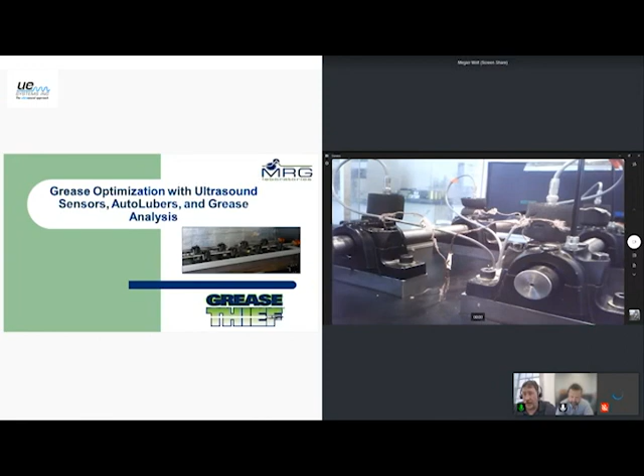In the background, I've got a little PowerPoint running to stay on topic. We're going to talk about a couple of advanced strategies for optimizing grease lubrication, one being using ultrasound and tying that in with the timely delivery of grease to the bearing being monitored, and the other being what we can learn from sampling that grease and analyzing it and looking at the chemistry and the wear and so forth. So two technologies that are quite complementary.

We'll introduce the idea of why bearings fail due to both over lubrication and under lubrication, and how ultrasound can play a really important role in getting that situation under control for a facility. I will talk about the role of ultrasound in delivering grease, how that becomes a solution for these problems of over and under lubrication. And particularly here today, talk about online sensors and how that can get us into a state of optimal grease delivery with real-time feedback into the process.

Then I'll give you a chance to talk more about the kind of problems that can be found in the bearing itself, once a bearing was installed and it had damage, or it developed some damage over time, and how ultrasound can pick that up. Then we'll get into the demo of the test stand and show how these sensors integrated with the auto lubers work. And then we'll crack open a bearing in the lab and show how we use the Grease Thief sampling kit to pull a sample out,

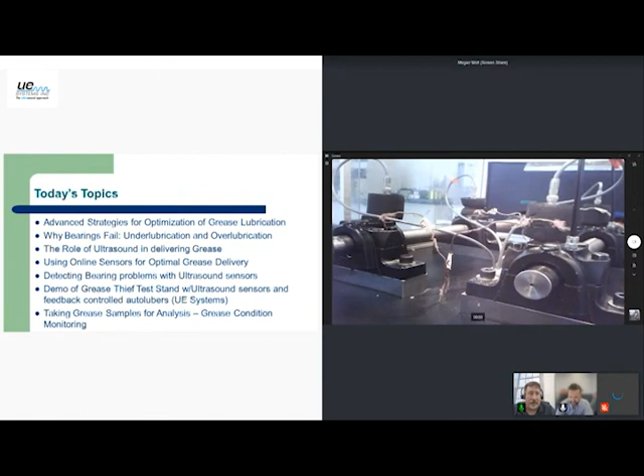and talk about the analysis that can be done once we have that. But over and under lubrication, the point is, unless we know exactly when and how much to add, then we are by default over or under lubricating.

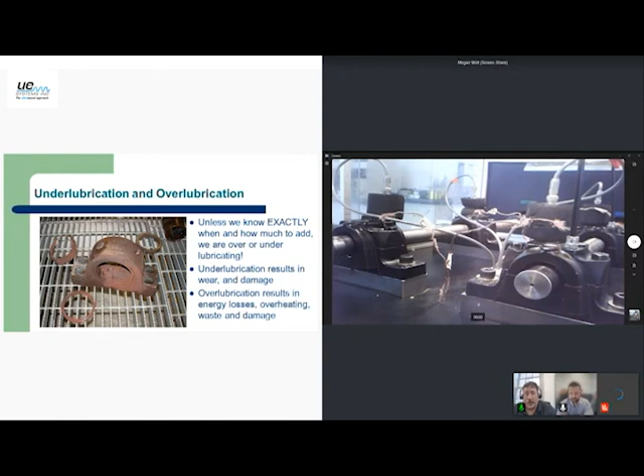And under lubrication, we'll talk about both of these. Under lubrication results in wear and damage, and over lubrication can be things like energy losses, overheating, and so forth. I've addressed this in the past in the context of really sustainability when it comes down to it. Sustainable processes towards lubrication, and how the default state of the industry ends up being over greasing, in my opinion. And here's some reasons why.

So you've got three potential states. One is, well, you just got lucky and you are greasing exactly how much needs to be there at the exact right interval. Or maybe you're using these technologies to get you there. But nonetheless, if it's not the exact amount that's needed and when it's needed, you're either under greasing or over greasing.

If you are under greasing, that means that there's either an inadequate quantity of grease to the location that's needed, or it's being delivered there too infrequently. And so the result of that is machine damage. And machine damage leads to failure and loss of function. So what is the natural human reaction to machines failing and the confirmation of a lack of lubrication? Well, the response is grease more.

And so once we grease more, now we get into overgreasing. And when we have overgreasing, what are the effects? Well, there's machine overheating. There can be cleanliness issues as the grease gets into other areas it shouldn't be. We have the excessive cost of grease. We're spending more to purchase and use grease than we really need to be. There are disposal issues about the excess grease that's there, and then some hidden effects.

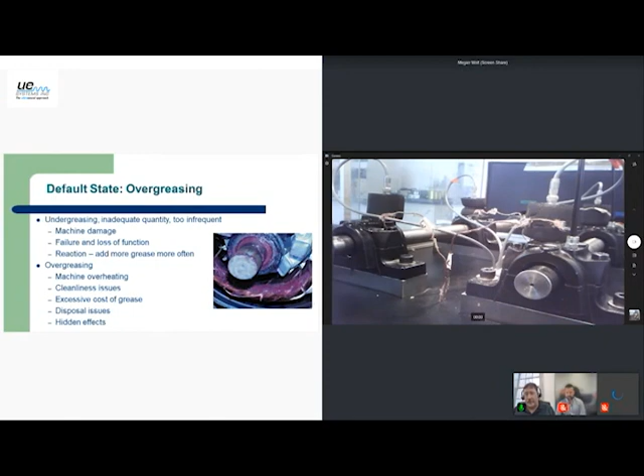But I think when you look at all of these, they kind of fall under either hidden or harder to see. It's easy to see when the machine has failed. Everybody's involved. Everybody knows there's noises, there's bangs, and we're not producing what we're supposed to be producing. But when our default is overgreasing, it's a quieter situation. It's less obvious and less in need of immediate action. So I would say from the typical human response and how we operate in most production facilities, we end up overgreasing most of the time.

And so that creates this opportunity to reduce grease demand by moving towards optimization. If we're mostly overgreasing and we move towards the optimized state, that's going to save some grease. It's going to move us on that line of sustainability. So this gives us an opportunity to extend grease life, to eliminate unnecessary relubrication, and to raise the awareness of the impact of over lubrication on cost, as well as the impact to the planet, the impact to sustainability of our processes. And so we can actually get into some calculations about, say, the carbon footprint or the emissions coefficients of using grease unnecessarily.

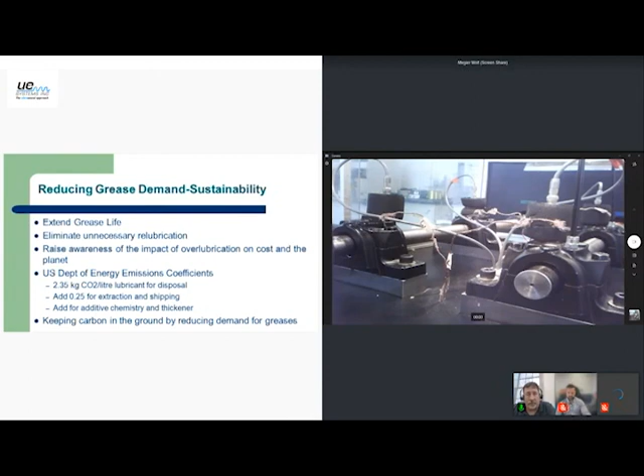And there's some calculations that we can do here, and I've gone through some of that, but ultimately we can determine what our footprint is for a non-optimized greasing situation, and actually project what we could do for our companies or organizations by moving towards optimization. It involves keeping carbon in the ground, because that's what we're putting into the machines, hydrocarbons as greases. So Blair, I'm going to put one of the first slides that you gave up next, and let you lead in this evolution where we talk about how we've historically done it and how we move to some of the options that are out there today.

Yeah, and thanks, Rich. It's always great hearing the sustainability part. That part always really impresses me. And we are doing some studies around measuring friction and that cost of friction and what that means to increased load and energy and things like that.

But as we look at this now, keep in mind, this is how Blair sees the evolution of bearing lubrication. It's not an exact timeline here, but if you look at when we started lubricating machinery, we started generally with whenever lubrication, and what I mean by whenever is, when we get to it, I'll lubricate. If a little bit's good, a lot is better type strategy, and that still exists in our factories today.

And depending on the bearing type and the machine type and the load and all those things, it can serve somewhat okay. But really, what happened over the evolution is companies developed formulas, and there are some standard formulas. There's some different formulas, there's some variants in those formulas, and it doesn't really matter what formula you use. Any of the formulas, at least that I have seen, always has some variables in them that change over time.

Speed of equipment, and more, we're seeing particularly rotating assets move towards VFDs, so variable speeds, in lieu of control valves and things like that. So they're starting to ramp up and ramp down the speed of assets based on production demands and things like that. There's temperature. I'm based in Canada, so our summers do get hot, but our winters sure do get cold. So temperature can have a big fluctuation in how much and when to lubricate. So those calculations do have a lot of variance in them.

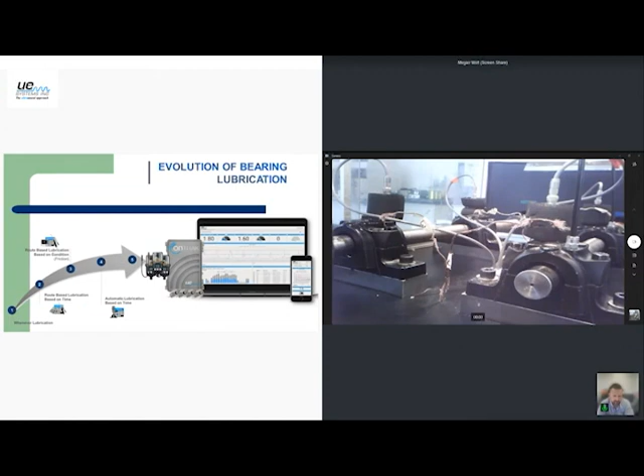So what are we doing when we're using ultrasound? For those that aren't familiar with ultrasound, I'll keep it high level. And if you do have any questions, we can definitely dive a lot deeper into the theory and use case of ultrasound. But essentially what we're doing is listening to things that you can't hear. We're listening at a very high frequency that even dogs can't hear, right? So this is above 20 kilohertz. Typically, we try to center our frequency around the 30 kilohertz range to measure that.

And what we're doing is essentially measuring the friction in the bearing. And the reason I say friction is because it becomes very simple to understand and use, even as you get up to the C-suite, to justify things like this or to explain what you're doing. Friction becomes very easy to understand. Friction is bad. We don't want friction in our equipment. So it's really simple.

That's the friction: the bearing friction increases, and it increases for two reasons. One is lubrication. So there's a lack of lubrication as that grease starts to degrade in that bearing. Obviously, that friction is going to go up. But also, we can look at the monitoring side or the health of that bearing as well.

So if there's a defect, I don't care if it's inner race, outer race, cage issue, individual rolling element issue, it's all going to produce an increase of friction. And how much that friction increases and what that pattern starts to look like, obviously we can start to do FFTs and look at bearing pass frequencies and things like that, becomes very dependent on the failure mode.

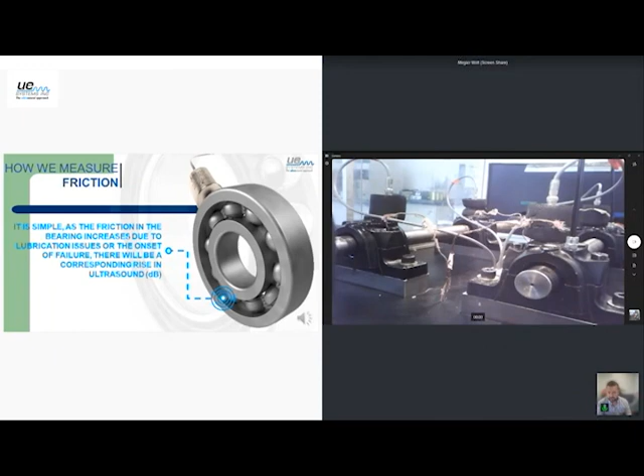And if you go to that next slide there, Rich. So this is an exaggeration. Now this is under lubricated. And I fully agree with you, Rich, that what we see, unfortunately, is over lubrication. And I can tell you, back in my history, when I was green, I definitely over lubricated, and we see that all the time. And I'm starting to see the messaging around not over greasing really start to resonate more and more in industry as we attend conferences and things like that. So I think we're heading down the right path.

But with this ultrasound technology, we're continuously monitoring the bearing friction. So we're fundamentally answering two questions. These are the same two questions that Rich brought up earlier: know when grease is required. So when we see an increase of that friction, the question is, how much does that ultrasound, and we measure ultrasound in decibels, have to increase? Right. And we'll answer that on the next slide here.

So we know based on ISO standard when the increase is likely related to lubrication, and when it's a defect beyond lubrication. And we have tons of case studies we can dive into. But not only do we know when grease is required because of that increase of friction, we know precisely how much is required, because we're trying to restore that friction back to its ideal level. It's something you're going to hear us refer to as the baseline. And how you determine that ideal friction is a conversation on its own.

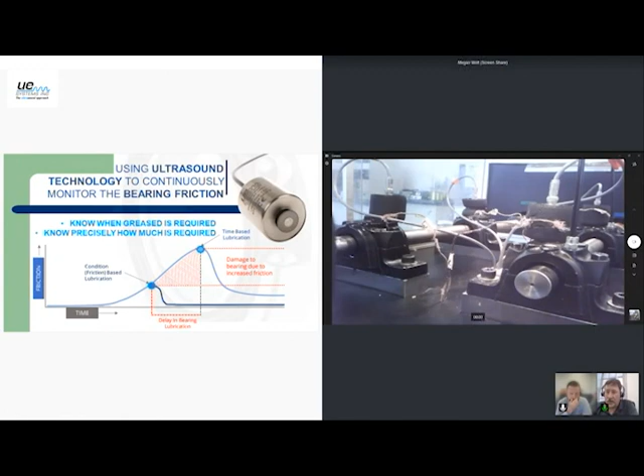But what you observed with implementation of a system like this tells us that idea that less more often is better than more less often is borne out. I should have talked to you earlier, Rich. Is that what you're saying? No. I mean, it's great, and these things take time. All along, by using these technologies and good principles, we've been incrementally improving lubrication, and this is just another step to get us closer to optimal, which is great.

Excellent. Let me go to that next slide. So how do we determine that increase of friction or decibel? I will interchange ultrasound and friction during this conversation on purpose. This is an ISO standard, and it states that once you have that baseline, an 8 decibel increase indicates a lack of lubrication. There's other things that can affect that friction. A 16 decibel increase indicates it's likely damage to the bearing beyond lubrication. And 35 is critical failure. It's walking down the hallway, the temperature's hot and things like that.

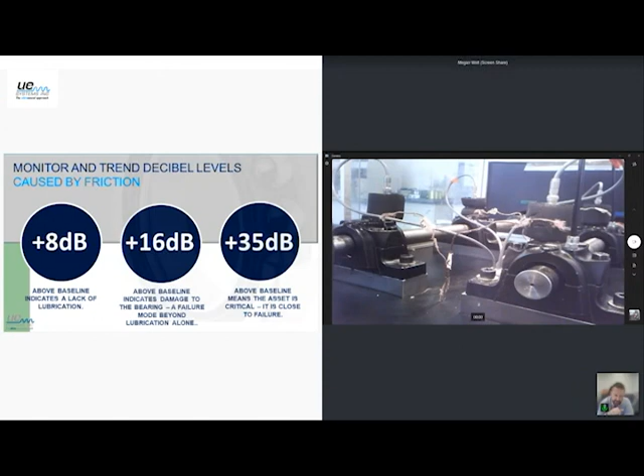In fact, we have a bearing in this lab that's not quite at that stage, but it's definitely not a healthy bearing. Maybe you can go to that next slide for me, Rich, and Sloan, if we're going to get into the live demo, could you start that machine up? We do have a bad bearing in there, so we don't want to run it through the whole demo. So maybe, Sloan, we could start that up just so we can get some data in.

But we're going to start. We'll show you some live data coming in from these bearings, and on purpose we have one that needs lubrication, we have one that's completely dry, and we have one or two that are hand packed or lubricated.

And what we're going to see here is a trend like this, and there'll be some other widgets that you'll start to see here. That green line, that dotted line on the bottom with the blue squiggly line, is the baseline, right? So that blue line is that friction we're measuring for a 24-hour period. That green is the baseline. So this is where ideally we want to see this.

Now you will see some peaks and valleys in that blue trend, and that's normal. There's no such thing as a perfectly smooth bearing. There's always going to be slight increases in friction, things like that, load changes. That blue dotted line, that's our lubrication level.

That's 8 decibels over. And what's great about that is there's no such thing as a bearing that needs lubrication and somehow fixes itself other than needing lubrication. So it has to go above that blue line and stay there, and that's our sign that it needs lubrication. And then you can go in, you can lubricate it manually, or the system can lubricate it for you, restoring to that baseline.

That yellow line is the warning. So if it goes above there, then you're starting to have some issues. Now you can wait for that lubrication to hit that level and then try to restore it, but you might be putting some secondary damage into that bearing. And that red, we don't see it too often, but unfortunately we do. It's not in a good state.

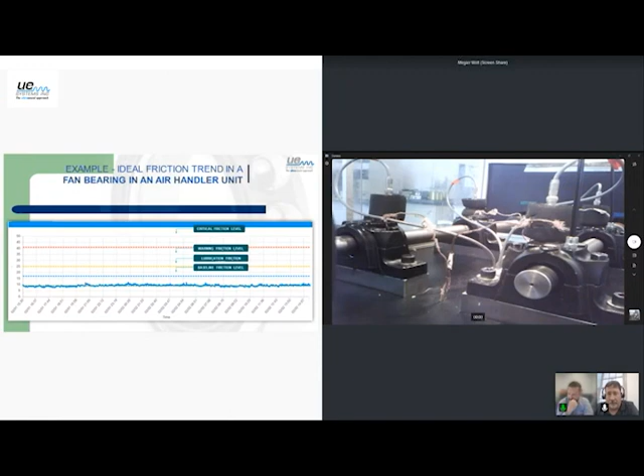So what we're going to see here is, again, that slide before was the ideal, right? This is what it looks like when a bearing needs grease, and this is an air handler unit. So you can see it go above that 8 decibels, it stays there. And if you reference that previous slide, you start seeing a lot more impacting. So the first thing we actually see is impacting, then the decibels start to go up.

To give you an idea, the OnTrak system is sampling the friction data from each bearing, and the OnTrak can monitor 16 independent bearings and lubricate 16 independent bearings. It's measuring that bearing friction at the rate of once per minute. So we get very, very granular when you think about an online system. So we start to see impacting, and we've picked up things like loose belts that will show up in friction.

But you notice here, when the user went to go lubricate, there's a mode I call human in the loop. So it gives you an alert. It'll send you a text message saying, hey, bearing 101 and 800 needs lubrication. And you say, okay, go lubricate. And there's also a fully automatic mode where it will just say, hey, bearing 101 needs grease, I'm lubricating, right? And it becomes a trust thing. So there's different methods of doing it.

It's interesting because we've seen people move from, I used to grease this motor once every year, to, if I get an alert, I can't wait till the next morning to lubricate. And I said, well, you were going to wait another 8 months before you lubricated, but you can't wait till you get back into the office. And I'm not encouraging anybody to do it.

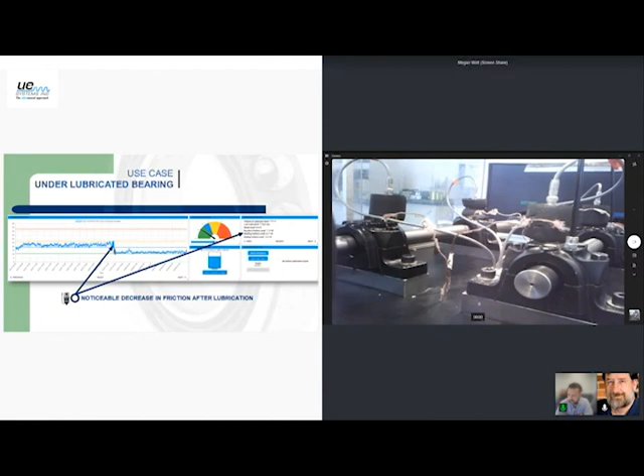Did you want to go over to the demo, Rich? Maybe I can't hear you, Rich, if you are talking. Maybe Tim, you could share your screen for me. Perfect. Thank you, Tim.

I'll do a quick introduction. Tim Going is our head of commissioning for UE Systems. He goes around and does these commissionings. So he's seen a lot of this data, a lot of these sensors. So I'll quickly walk through, and Tim, you're more than welcome to join and comment if you need to, or Rich.

But just to give you an idea, what we see on here is the friction level on one trend. Now you can customize these trends to show one, to show them all, things like that. But this is real data coming in from this system. So if you look at the top legend, sensor number 5, this is the blue here. And what we're seeing down here is this blue. If you notice, it's a little bit below.

And because this bearing skid, and Rich, you can jump in here, is essentially a motor spinning a shaft on two pillow blocks, there's really no load, right? So we're not going to see a huge decrease in that friction because there's no load. If we were to put a load, it'd be changed. And because it's an open bearing, we're not going to see a big drop.

But you can see this blue here is the sensor that needs lubrication. Sensor number, I think it's 6 and 3 are the ones that are lubricated, and sensor number 4, this guy right here, this is the dry sensor. So even just looking at this and understanding that maybe this audience doesn't understand ultrasound and how we're measuring it, just look at it from a friction point of view.

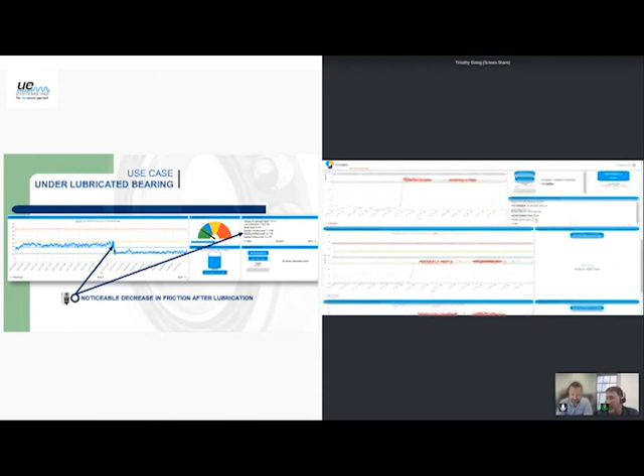Yeah, well, let me ask an actual important question right now, because bearing 4 here, we started with it dry. And Sloan was just asking, can we shut that shaft down? I don't know if you're monitoring bearing 4 right now. Yeah, you can shut 4 down, absolutely. Okay, so as long as it doesn't affect 5. It shouldn't. 3 and 4 are on one shaft, and 5 and 6 are on another. So yeah, absolutely. She should have the word there to move ahead with that. Yes, and thank you, Sloan. I don't want to kill that bearing. Yeah, exactly. That would be bad while we're trying to demonstrate the values of this, to run with the lubricant starving one of our bearings. So go ahead there, Blair.

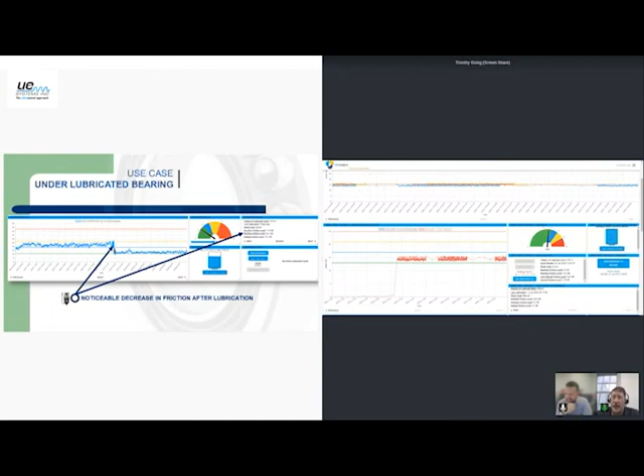Did you have a specific question for me? Well, just maybe go into details of why we have to fill that housing just by the design of it. Oh yeah, so these particular housings, they're kind of a unique or different kind of housing where it's not a typical pillow block which has a dual row. A lot of times they're going to be like dual row spherical roller bearings with W33 groove, and then a center grease delivery that goes right through the outer race and in through the bearing. These are straight back bearings like you would see in an electric motor application. And then the housing is a straight bore, and the grease gets delivered to the side of the bearing.

So here what's happening is when that grease is being delivered, first off, you have to have a primed line up to the point where grease enters the housing. And then it's going to lay that grease right in front of the bearing. So sometimes you have to build up a little mound of grease, if you will, along the face of the bearing before new grease being added is actually going to contribute into the raceways. And this is actually more similar to what you see in electric motor applications. So this is more like an electric motor shaft simulator that happens to be held by pillow block bearings. Excellent. Way better job describing that than I would have, Rich.

No problem. So what we're seeing here is that real time, down to the second, friction level. So you can see it's bouncing around, and it may take 2 iterations. So you can see on what we call the status widget, it says waiting. So it said lubricating. So it put grease in there. What it's doing is just patiently waiting. It's waiting to see if that friction is going to change and if it's going to need to put more grease in. So as we're waiting, it's going to count down, and that time is 5 minutes.

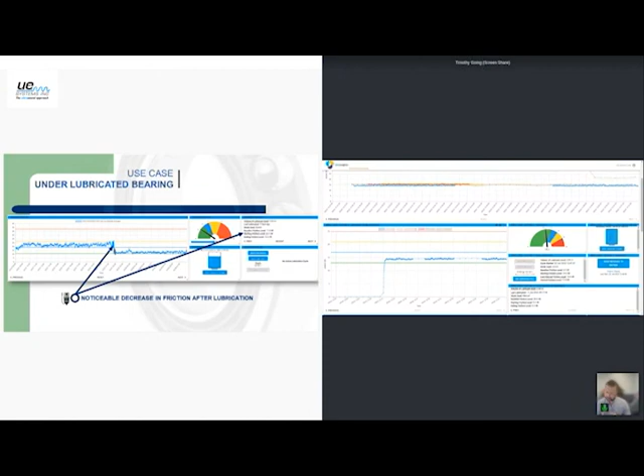And what I'm going to ask you to do, Tim, if you could just click on the average value, that blue line on that widget for me, and I'll talk a little bit about what this is. And maybe you could hide the red one for me, Tim, just so we could discuss this. So one of the things is because we're taking the samples so quick, we're taking it every second, we are going to pick up peaks and valleys, right? We're going to pick up grease hitting that bearing, going through the housing.

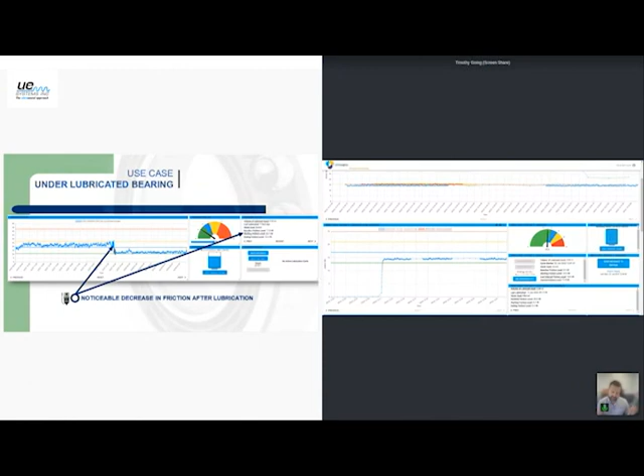So one thing we do in the software platform is we take that raw data and we average it. We use a moving average. And it smooths out some of those bumps, and we can change how many samples are in a moving average. But we like to look at this, and oftentimes we'll hide the raw data and just show this moving average because it looks smoother, and it shows that drop better. So I just wanted to make you aware that we have two ways of measuring this.

So we're down to a minute here. This is the watching a pot boil.

Thank you. So we can start to see here, our baseline friction is 0. And we actually do put it to 0 sometimes when we're commissioning, just to see how low we can get that number if we know the conditions of the bearings and things like that. So our starting friction was 14.6. Our last interval friction was 14.6. So we've only done one interval. We've only put in grease. We put in 2 cc's at one time. So that's what we count as one interval.

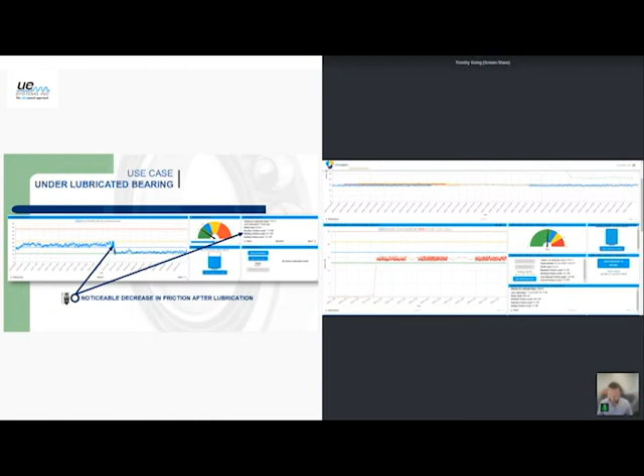And our current friction level is 14.7. So we haven't changed that friction yet. But I imagine here in 26 seconds, as we put more grease into it, we'll start to see that number come back.

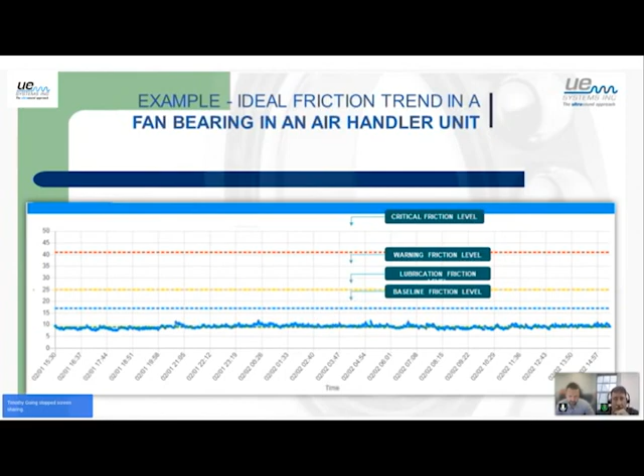Oh, I think we lost the live screen there. It went back to the slideshow there, Rich. I don't know, Tim, if you have to reshare or not. Yeah, I saw it there for a moment, and then it disappeared for me too. Okay, we're back. There we go. Super. Perfect. Thanks, Tim.

Okay, 12:47. So we're going to wait. So it made that decision because we have our baseline set at 0. It's saying, hey, I'm still not at my baseline friction. I haven't reached the max capacity of that bearing. So I'm going to lubricate again, right? And it's making all that logic for you. So right now, grease is entering that bearing.

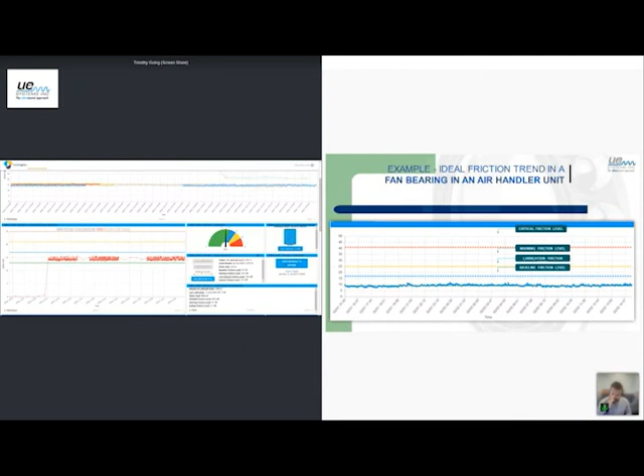If you zoom into this, we probably would have seen this, or someone caught it with their eyes. That gauge widget where it said 14.4, it probably went up to 17, somewhere in there, as grease hit the bearing and went over to the right. And then hopefully we'll start to see this drop down to the left here. And again, you can start to see how this system works. And actually, one thing you would have started to see is the lubrication level starting to go down and things like that.

And then below this one, you can see the last time we did this morning, just to make sure. I think Sloan MRG did it, just lubricated this morning, just to prime everything as much as we could. So she put in 2 cc's, so we can go back through any point in history. So again, we're pushing grease through, we're pushing it in slowly, so we're not expecting... I am seeing some drops here on the right side start to go down.

If you take a look at the average, Tim, are we seeing that trend go down at all? Right, so we might start to see this start to go down as grease is hitting the bearing. And this is the waiting game of lubrication, right?

And I think it gives a good analogy, though, as you're applying grease. We have some videos of people using ultrasound guided lubrication or handhelds, but then they're pumping grease in like this, right, as fast as you can. So it kind of shows you how methodical, if that's the right word, you should be putting grease into a bearing, and the system does it for you.

So we're sitting here watching paint dry. I understand that, but hopefully we'll start to see this level go down. But it depends on that bearing. We did see it as we piloted it last week, but conditions could have changed here.

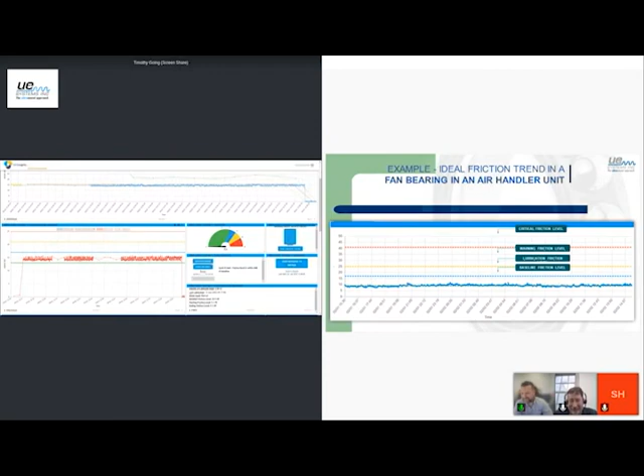Well, this actually worked out well, because you can see here, it was done right before it was making that decision to lubricate again. So it said, "Hey, I'm at baseline." We set our baseline to 0. But hey, friction levels within 2 dB. We reached it, right? Can you blow up that last data point where you can kind of see that it was indeed dropping right before Sloan turned that off? I think there's a last data point there that's pretty much lower than where it had been. So it looks to me like maybe some grease was getting in there.

And this happens too, Blair, right? That sometimes a little grease gets in, it kind of gets flung out, and so sometimes you go down a little bit, up again, and then down again, and this is part of that patience of response that a system like this affords, or someone using ultrasound, it gives them the opportunity to have some patience, listen, make sure that drop is a sustained drop in the decibel levels.

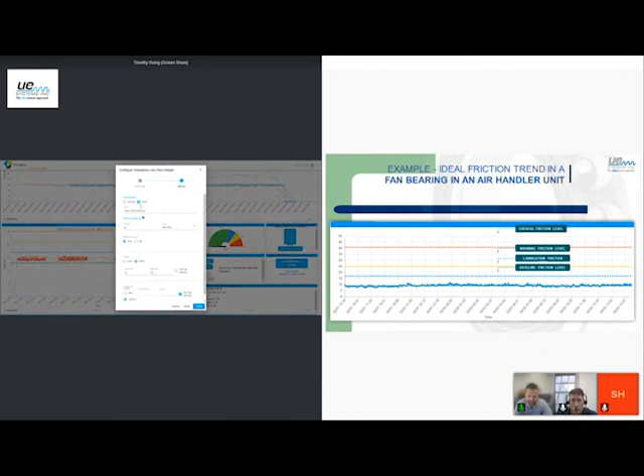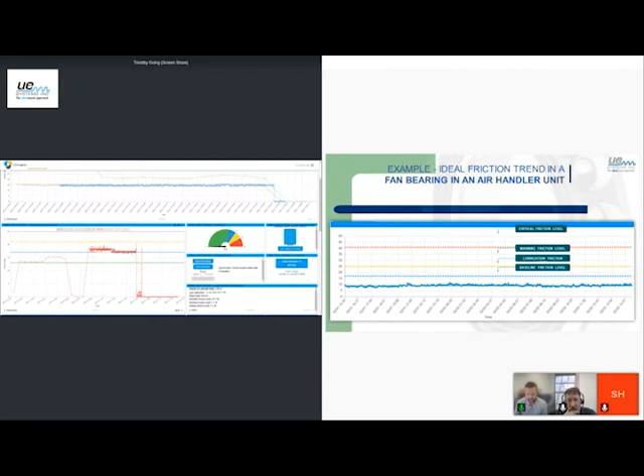Exactly. Need to take it to the pilot data so you can have an idea of what that looked like. Yeah, absolutely. If you want to show what it looked like, I think we had to put a few iterations of grease in there. So this was, I think, last week. Right. Look at that. So you can see that friction drop right there where his cursor is. A little grease was added. So what was that? Maybe a 3 or 4 decibel drop, right? We can see it, and you can also see the impacting, just those outliers on the top and bottom when it needed grease, to how much more condensed it was when grease was added.